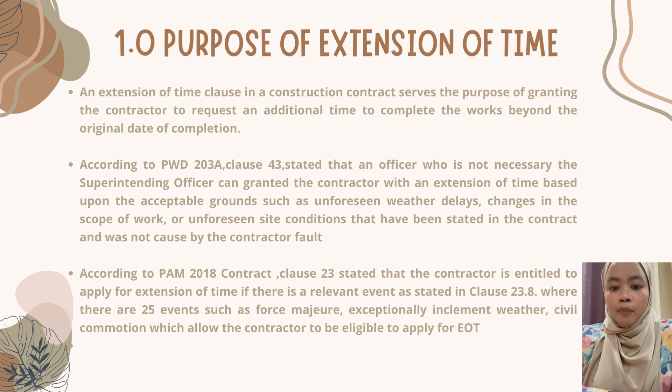Assalamualaikum warahmatullahi wabarakatuh. My name is Muklis bin Sabirin. Today I'm going to explain about the extension of time based on contract PWD 203A. PWD stands for Public Work Department in Malaysian Built Environment Industry, also known as Jabatan Kerja Raya, JKR. PWD contracts are widely used in public sector or government projects for both building and civil engineering work. The PWD contract has two types, which are the PWD 203A and 203 form of contract.

EOT in PWD 203A is stated in Clause 43.1, which states that the contractor is permitted to ask for an extension of deadline for finishing the work in case of delay or unanticipated event.

Now I'm going to explain the procedure to apply EOT in a PWD 203A contract. First, the contractor must adhere to particular guidelines and fulfill specific conditions to be eligible to apply for EOT. Based on Clause 43.1, the contractor should notify the competent authority, which is the SO, in writing of the reason for the delay and all pertinent information, along with supporting documentation, as soon as it becomes fairly evident that the work is progressing more slowly than expected.

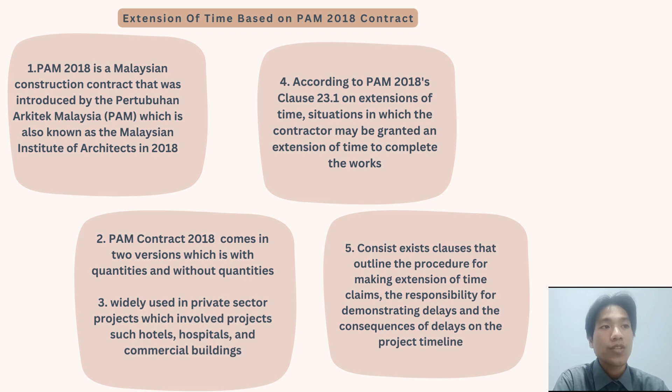PAM Contract 2018 comes in two versions, which is with quantities and without quantities. PAM is also widely used in private sector projects, which involve projects such as hotels, hospitals, and commercial buildings. According to PAM 2018 Clause 23.1, extension of time, it outlines situations in which the contractor may be granted an extension of time to complete the work. Lastly, it consists of a clause that outlines the procedure for making an extension of time claim, the responsibility for demonstrating delay, and the consequences of delay on the project timeline.

Lastly, I'm going to explain the procedure to apply EOT in a PAM 2018 contract. First, the contractor must adhere to particular guidelines and fulfill specific conditions to be eligible to apply for EOT. Based on Clause 23.1 of PAM Contract 2018, the contractor must submit a written notice and particulars to the architect within 28 days of the day of the letter of intent, if they intend to claim an extension of time. The contractor must provide supporting documents, adhering to specific notification requirements and claiming an EOT through a predetermined process. Then, if the architect determines that all the requirements are eligible, the extension of time will be granted to the contractor.

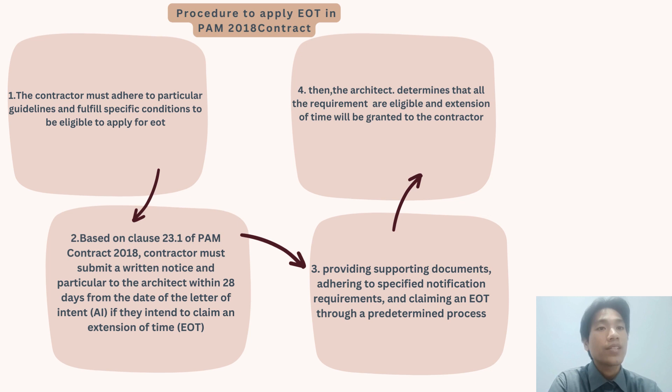Thank you, my name is Ahmad Zari bin Azhar, and I will now briefly present our project background. The project involves two academic buildings, a multipurpose hall, and a workshop on lot 22-12-23 in Seri Iskandar, Perak.

Our contract sum stands at 10 million Malaysian ringgit, with a commencement date of October 20, 2021 and a target completion date of October 20, 2023. Our client is the Ministry of Education Malaysia, and it is imperative to note that any delay that occurs will be rated under our LAD at 5,500 Malaysian ringgit per day, as per PWD, as our contract condition.

Now, let's delve into the chronology of extension of time for our ongoing project. As of April 2, 2023, two academic blocks and most infrastructure works were practically completed, but delays were encountered in the workshop blocks. The Ministry of Education Malaysia, as the client, issued a notice of delay on April 2, 2023, signaling the intention to impose LAD if the final block wasn't completed on the agreed dates for completion.

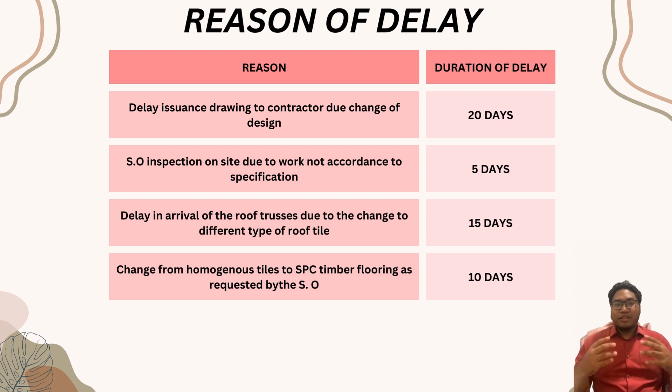This application aims to ensure a fair assessment of the project timeline, considering the unforeseen challenges faced by the main contractor. Thank you for your attention.

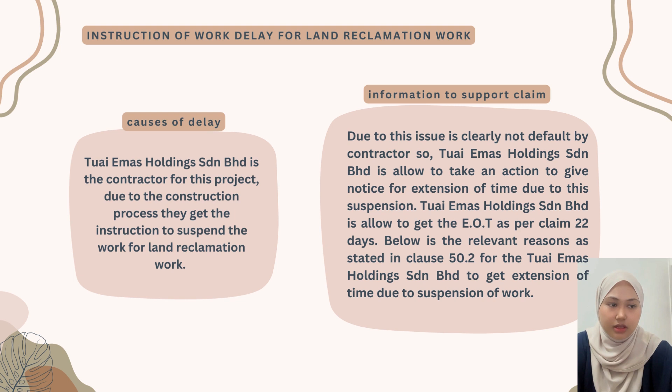First is instructions of work delay for land reclamation works. The causes of delay: Tuai Emas Holdings Sdn Bhd, the contractor for this project, is due to the construction process: they received instructions to suspend the work for land reclamation. Since this issue is clearly not a default by the contractor, Tuai Emas Holdings Sdn Bhd is allowed to take action and give notice for extension of time. Due to this suspension, Tuai Emas Holdings Sdn Bhd is allowed to get an EOT claim of 22 days. Below is the relevant reason as stated in Clause 50.2 for Tuai Emas Holdings Sdn Bhd to get an extension of time due to suspension of work.

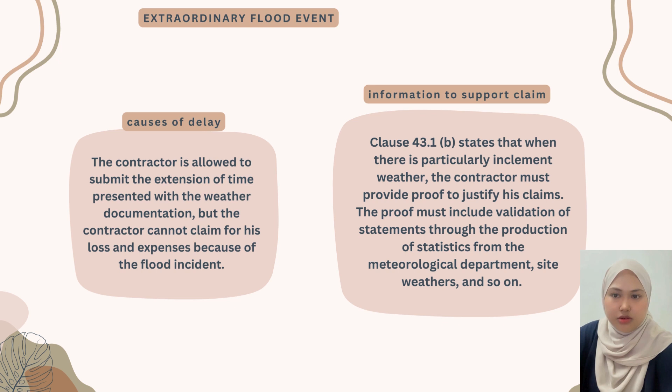Second is an extraordinary flood event. Causes of delay: the contractor is allowed to submit the extension of time presented with weather documentation, but the contractor cannot claim for loss and expenses because of the flood incident. Information to support the claim: Clause 43.1b states that when there is particularly inclement weather, the contractor must provide proof to justify the claim, including validation of statements through production of statistics from the meteorological department, site weather records, and so on.

For the third case, the location of the construction site is involved with the operational activity of the Kuantan Air Base, in air movement and the taxiway. Causes of delay: the contractor is entitled to an extension of time; however, the contractor is not entitled to claim for loss and expense as a result of this delay event. As a result, the SO has the right to provide instructions for fulfilling TUDM operational activities, as stated in Clause 43.1e and Clause 5.1i.

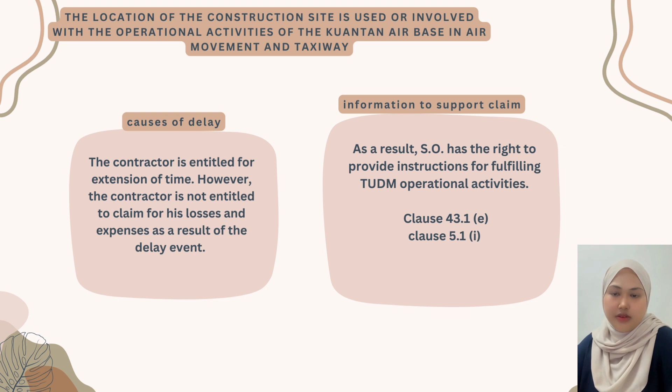For the fourth case, additional work of reinstallation of chainage markers and point bearing markers. Causes of delay: the delay is attributable to instructions issued by the SO, referring to additional work required to reinstall the chainage marker and point bearing marker. Based on Clause 43.1e, the instruction must not be issued due to any negligence, default, or breach of contract by the contractor or any subcontractor, nominated or not. This indicates that neither the contractor nor any subcontractor involved in the project is responsible for the delay in receiving instructions.